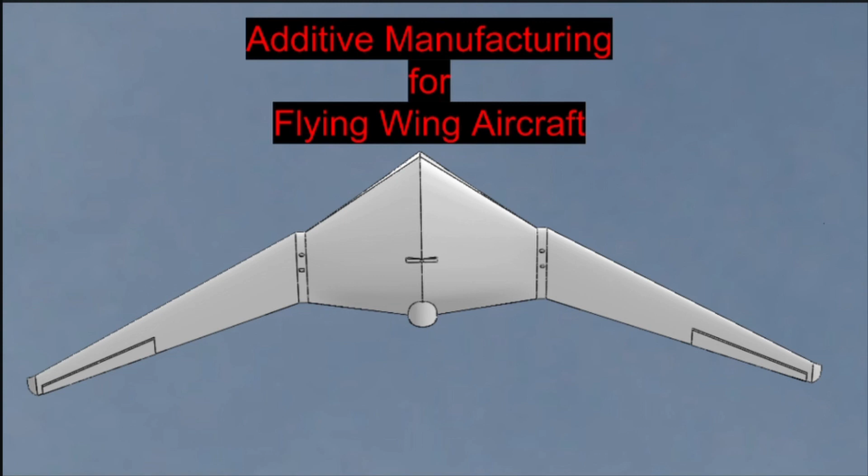Hi, thanks for joining me. Today I'm going to be presenting my project on using additive manufacturing for flying wing aircraft.

Let's start with the applications and purposes for these aircraft, because if an aircraft doesn't have any applications and purposes, there's no point in making it, even if they're really cool. Air travel is right now the fastest and safest method of travel, but it has one major downside, and that is cost. Right now, air travel is currently the most expensive method of travel.

So, in order to solve that, flying wing aircrafts can greatly reduce fuel consumption by making aircrafts more aerodynamically efficient. That is probably the top application for this aircraft. However, there are many others, one being for smaller civilian aircrafts.

Right now, small civilian aircraft only have a few hundred nautical miles of range. So, like a Cessna, rather than having 500 nautical miles of range, it could be increased to something like 800 nautical miles, because flying wing aircrafts use less fuel and are more aerodynamically efficient, which allows you to fly farther. It also increases the internal volume, so it can carry more fuel, which will further increase the range.

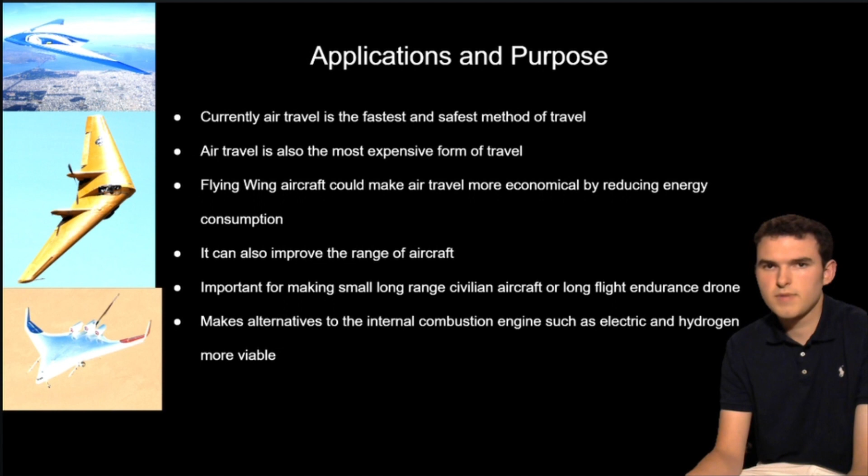Aerospace engineering is sort of like a balancing act between various different design domains that's grounded by the laws of physics. The goal of this project was to make a flying wing aircraft that's aerodynamically efficient, make it using locally available 3D printers, and make it stable enough to fly properly. So the main design domains prioritized for this aircraft would be, of course, manufacturing, because it needs to be made using additive manufacturing technologies done with locally available 3D printers.

And then, of course, it also needs to be aerodynamically efficient—it needs to be a flying wing, that's the whole point, so it needs a higher lift to drag ratio than a conventional aircraft design. Third, we need to prioritize the controls and flight stability of the aircraft. That's the third design domain that's prioritized.

But there are also other design domains that need to be taken into account. Particularly the weight—it needs to be light enough to take off the ground. It also needs to have a strong enough structure so it doesn't fall apart when flying in the air, because having a plane that falls apart is not good. Importantly, it also needs enough internal volume to house all the electronics, and of course it needs a method of propulsion, because if it doesn't have a propulsion system, it cannot maintain flight. That's all the design domains that were taken into account in this aircraft.

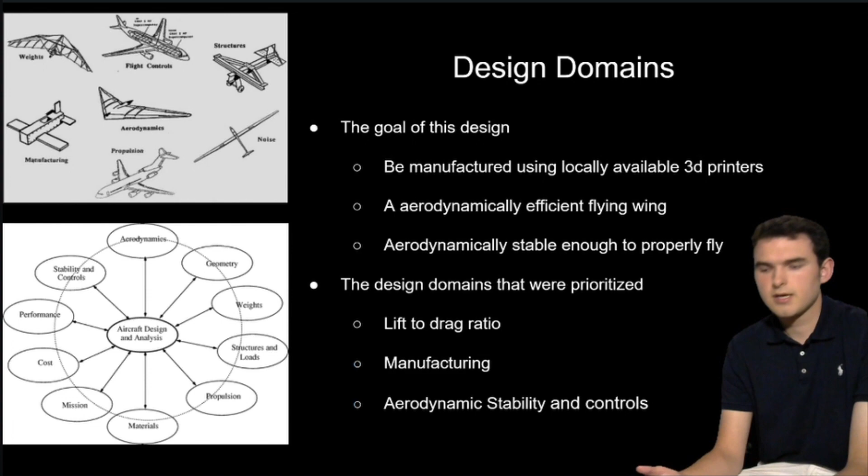So now I'm going to go over the problems with flying wing aircraft.

One of the issues with flying wing aircraft is flight stability. Flying wings have been around for a long time; Jack Northrop was the first to make them in the 1930s, and one of the huge issues was flight stability. They were difficult to control, and would sometimes even spin out of control. They didn't crash, thankfully, but it was an issue, and that's why the U.S. Air Force didn't use them in the 1940s—they couldn't control them stably enough for any practical application.

To solve that, a lot of aircraft use a reflex airfoil, which unlike a laminar flow airfoil reflects the air backwards. That makes it more stable across the pitch axis of the aircraft. It also has a huge drawback: it makes the aircraft less aerodynamically efficient because it's reflecting air backwards, pushing less air downwards. Airfoils work off the change of momentum of the airflow, and that has two benefits.

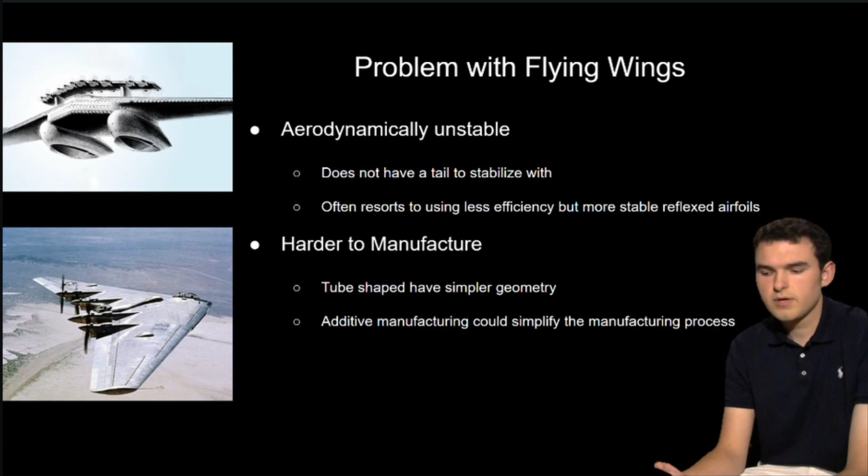Going into the aerodynamics of the fuselage, these flying wing aircraft could offer about a 20% increase in lift to drag ratio. But of course, one of the issues, as I discussed earlier, is that they rely too much on reflex airfoils. In this project, I addressed this by using the loft feature in SolidWorks to loft a reflexed airfoil to a more laminar flow airfoil that's slightly asymmetric. By lofting them together, you get less reliance on a reflexed airfoil.

As you notice in the flow simulation, the air becomes less turbulent and more laminar as you go from the center reflexed airfoil to the outer laminar flow airfoils in the fuselage design. To make up for the decreased reliance on reflexed airfoils, we use a V-tail in the back that increases the pitch stability and also the roll stability of the aircraft. It only adds a minimum amount of parasitic drag, which allows us to greatly improve the lift to drag ratio of the aircraft.

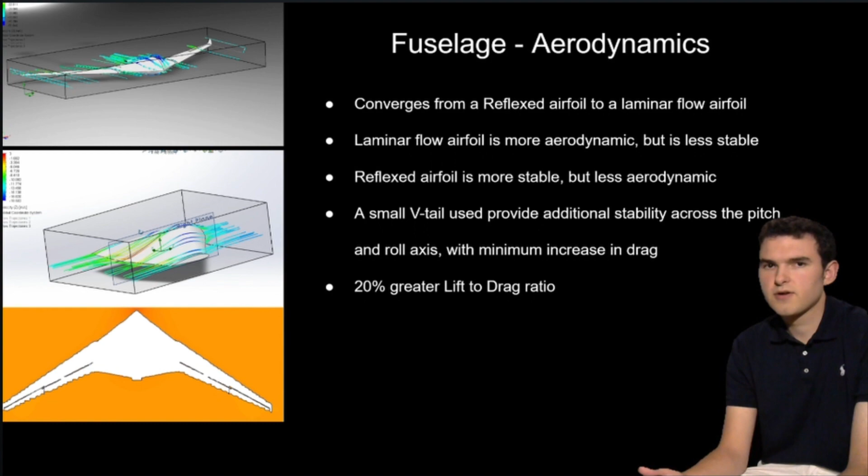So now going into wings. For the wing, I use a NACA 2412 airfoil. It's slightly asymmetric, and the reason I wanted it slightly asymmetric is that we want it to be as aerodynamic as possible, but we want a little bit of higher coefficient of lift, so that's why I didn't go for a completely symmetric airfoil, so the stall speed isn't too high. This also makes it more stable across the pitch axis of the aircraft, because it's pushing less airflow downwards relative to the bottom airflow of the airfoil.

One thing you'll notice about this aircraft design is that the wings are swept back 35 degrees. A common misconception about swept back wings is that they decrease the coefficient of drag of an aircraft. They do not decrease the coefficient of drag at all. What they do is increase the critical Mach number of an aircraft - the Mach number at which it enters transonic drag. A typical aircraft with a straight wing enters transonic drag at Mach 0.7, but by sweeping back the wings, you can increase that critical Mach number. In our case, with 35 degrees of sweep, it increases from Mach 0.7 to Mach 0.855.

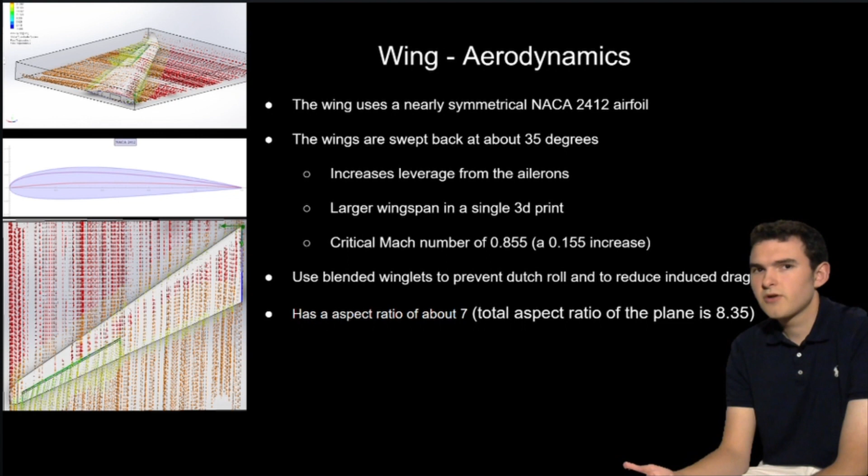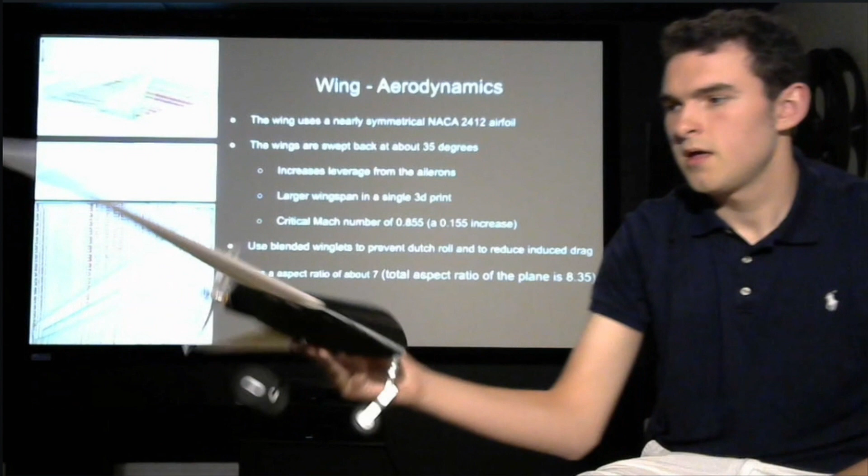Of course, the aircraft I built does not fly at Mach 0.7 or Mach 0.855. Here it is - is that right here? If you can see it. Hopefully you can see it. So, place it back there. So what this does, as I talked about earlier, is one of the advantages - it increases the critical Mach number. This aircraft is not going to fly at Mach 0.85, if you didn't already know.

However, it has two advantages for this particular aircraft. Since it's not aerodynamically beneficial, but it is beneficial from a control standpoint, as I talked about earlier regarding design domains, control stability was one of the biggest design domains of this aircraft. Sweeping the wings back actually improves the control and stability of the aircraft, because it gives more leverage to the ailerons, or in this case, they're technically elevons since they also act as an elevator. By sweeping them back, you're making them farther from the center of gravity, and that's what gives the elevons more leverage on the aircraft.

It also benefits it from a manufacturing standpoint, because by having the wings swept back, you can essentially print more area for the wing in a smaller print bed, since it spans across the X and Y axis. You can maintain a high aspect ratio while increasing the surface area of your wing in a single 3D print. So those are the benefits.

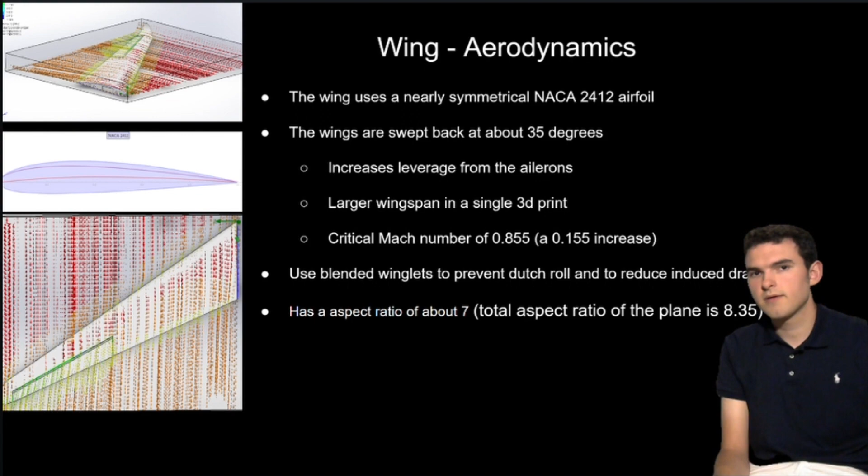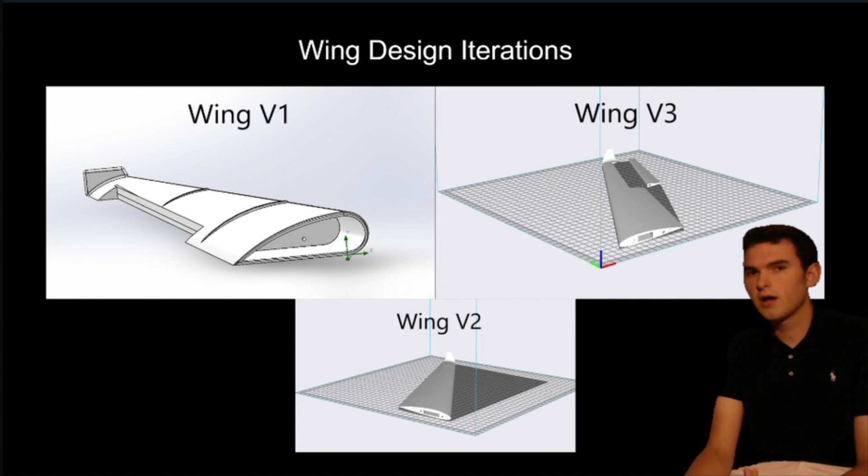So here's the wing design iterations. As you see, there's a V1, V2, and V3, and I'll get into all of those in the next slide. Starting with wing V1 - I'm not going to sugarcoat it, it was probably by far the worst design for this aircraft, but it was also my first time designing a wing in SolidWorks, and it very poorly fits the design parameters of this project.

For one, it uses a very highly asymmetric airfoil, which makes it well optimized for low stall speeds, but it has many disadvantages. It decreases stability across the pitch axis of the aircraft because it pushes more airflow downwards relative to the airflow below the wings. So it's not good for flight stability.

The second big disadvantage is that it greatly increases the induced drag coefficient, since it increases to the square of your coefficient of lift. By using these higher coefficient of lift airfoils, they actually make it less efficient from a drag standpoint. So if you want a higher speed aircraft, you want your airfoils to be less asymmetric to make the aircraft more aerodynamically efficient.

Another huge disadvantage with this design is that it has 4 times the wetted area, which greatly increases the parasitic drag - essentially the typical drag you think of in an aircraft, the drag that has to move around an object. Having more than 4 times the wetted area of the final wing design also doubles the weight of the wings, meaning a lot more weight to the aircraft, which requires a lot more energy to maintain flight and take off - a big disadvantage.

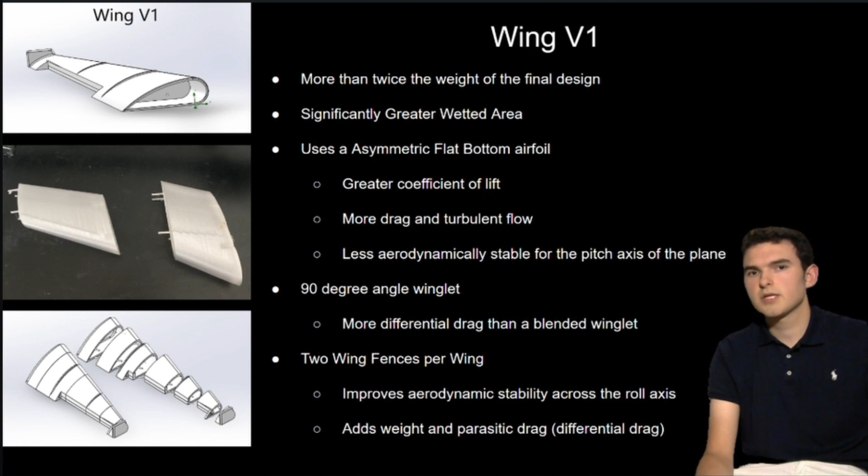So that's wing V1. Now let's go to V2 and V3. I included them on the same slide because aerodynamically they're the same - the key differences lie in the structure of the aircraft, or the wings. For V2 and V3, they both use the NACA 2412 airfoils, as I talked about in my first slide regarding the wings.

The difference is in the use of carbon fiber spars for structural support. Wing V2 is designed relying on carbon fiber spars for structural support. It has great strength to weight ratio, but it has 2 disadvantages that left me decide not to use them.

The first is that it takes up a lot of internal volume that's needed for electronics. The second disadvantage is that it adds more complexity to the manufacturing process, since there's extra parts that need to be placed into the aircraft. So that left me using Wing V3, which uses a structure that does not rely on carbon fiber spars.

Technically there's a V4, but it's a very slight change. Essentially, the first Wing V3 that I printed out, one of the issues was that it printed horizontally on the 3D printer, and it created structural supports between the hole used for the axle that links the aileron to the actuator of the aircraft.

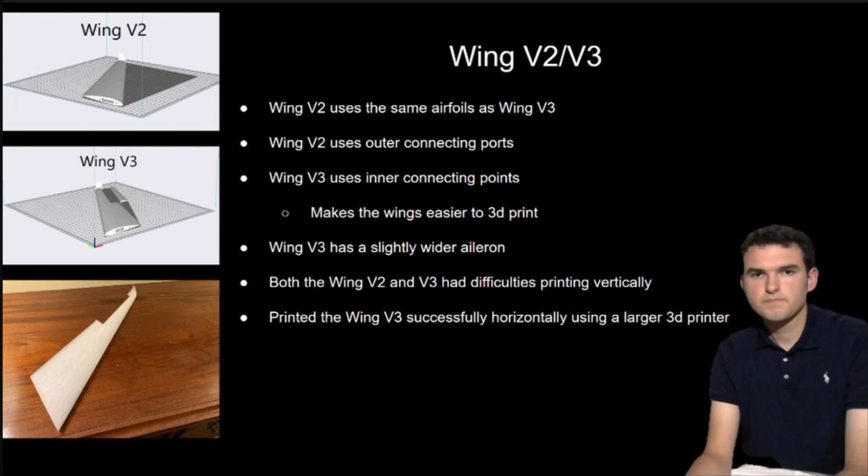For this wing, what I did was put a channel through the wings with V4, and that created more area for the axle to go through. Essentially what I did was put a straw in the channel that goes to the wing, and then I molded plastic weld around it to keep it holding up structurally. Then I put the axle through the straw inside the wing, and that allowed it to move around freely and connect to the aileron. So that's what I finally used.

So going into the structure of the fuselage: it's made out of an impact-resistant PLA plastic, and I decided to use PLA for this since it's fairly lightweight and easy to use.

For the wings, I use PETG, which has much greater tensile strength, but it is a little bit denser and thus heavier, about 11% more. PLA has 1.24 grams per cubic centimeter of density. PETG has about 1.38 grams per cubic centimeter of density, so it's a bit denser than PLA, and that's why I did not use it for the fuselage, which allowed my fuselage to be a bit lighter.

The structural strength isn't as important on the fuselage as it is on the wings, since the wings are longer and thinner. There's more stress on the wings, so that's why I went with a slightly heavier material that's stronger.

For the fuselage, one of the issues I had was having a top that could easily be taken off and on, since I needed to place electronics inside there and potentially replace them or program them by directly wiring the electronics into my computer to reprogram them if there's ever a software issue.

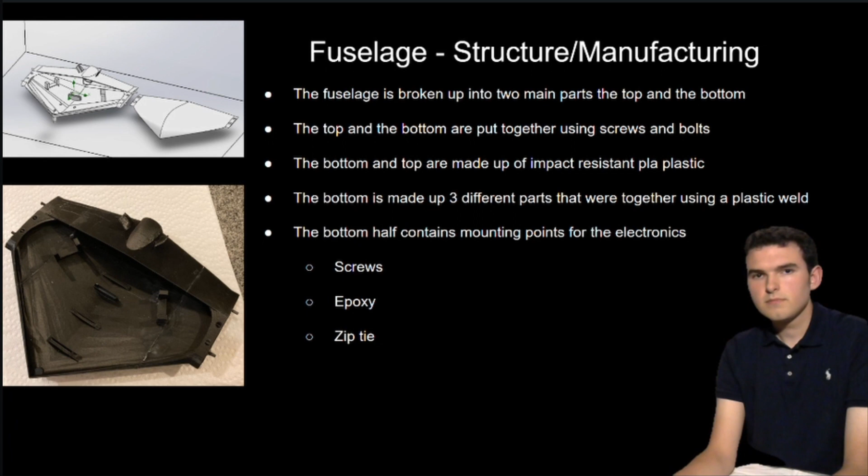The servos were originally intended to be epoxied in, but I later found out they fit so well, almost like a glove, that I could just place them in directly, and they're so tight that they didn't need any epoxy. For the battery, I had zip tie holes as mounting points, used for the battery and the ESC, which controls the amount of power that goes to the electric motor. And yeah, that's the structure of the fuselage.

Going to propulsion, originally this project was intended to use an electric ducted fan, since it offers greater energy efficiency by cutting off the vortexes formed around the tips of propellers with the duct. Not only that, but it also compresses the airflow, making it a much more energy efficient method of propulsion than propellers.

But they have major downsides. The duct greatly decreases the mass efficiency and volume efficiency of the propulsion system. That means you have to place it outside the aircraft, since there's not enough internal volume to fit the ducted fan inside for this particular design. And of course, it's a lot heavier than a propeller. Not only is it heavier, but it also requires a lot of outside structural supports, which add drag, as well as the duct itself adding more parasitic drag.

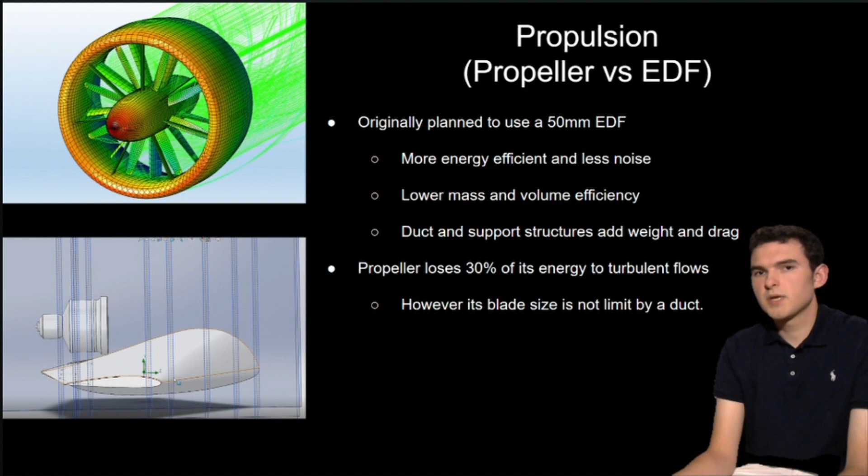And since it's placed above the center of gravity of the aircraft, it has to be angled downward slightly by a few degrees, which decreases the efficiency of the propulsion system as well. So ultimately, all these disadvantages led me to using a propeller, since it could be mounted directly into the aircraft and did not take up all this space or add an outside structure that added extra drag. That was a much better option, even though it had lower energy efficiency.

Going into the propeller that I used, to essentially decrease the efficiency gap between the ducted fan and the propeller, I used a new type of propeller called a toroidal propeller. It was recently developed by MIT scientists, particularly Thomas Sebastian, who came up with the toroidal propeller. By having the propeller angle inwards and have a curved tip, it reduces the tip vortices, making it harder for the lower pressure and higher pressure vortexes to mix together, which reduces the drag formed around the propeller and improves efficiency.

I went with a two-blade toroidal propeller, which I made using my 3D printer. The two-blade propeller has fewer pressure pulses per rotation than an equivalent three-bladed toroidal propeller, making the two-blade more efficient. However, it is louder, because the pressure pulses produced by a two-blade propeller are louder than those produced by a three-blade propeller. That's why I went with a two-blade, because it's more efficient.

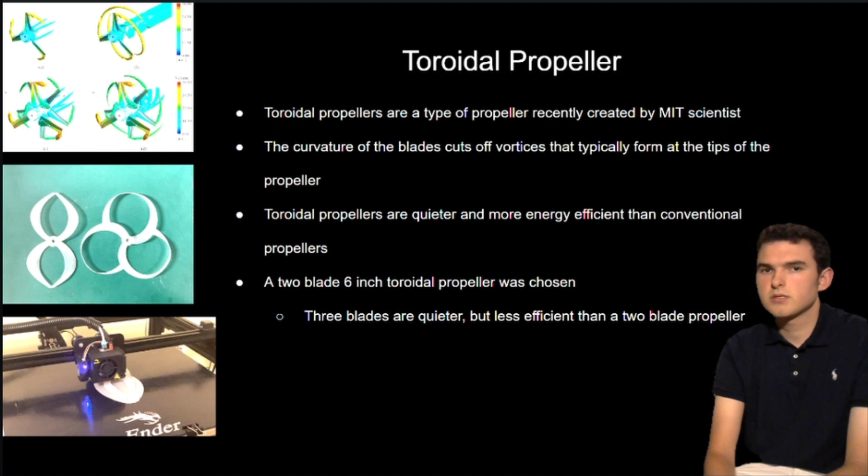Going to landing gears, finding the right ones for this project was tough, because Amazon and most other shopping sites online don't give the exact dimensions for the landing gears needed. And even for the ones that did, the landing gears turned out to be way too big for this aircraft. So I went to my basement and found my old Cessna model plane that I used to fly around and crash when I was younger. I took the landing gear out from that, and I found it had a great lock-in mechanism, which is used for mounting the landing gear to the aircraft.

It used essentially a small slit, and what you would do is compress the landing gear and squeeze it into that slit, and it would expand outwards and lock into the mounting, so no epoxy or plastic weld is needed. I used that mechanism and implemented it into my CAD model, and that made it a lot easier to implement the landing gear inside the structure of the fuselage.

That made it a lot easier on the design aspect. Going into the front landing gear, I used a mounting point and then epoxied it in. In that landing gear, I found one online, and that one actually gave me the dimensions, and they were good dimensions.

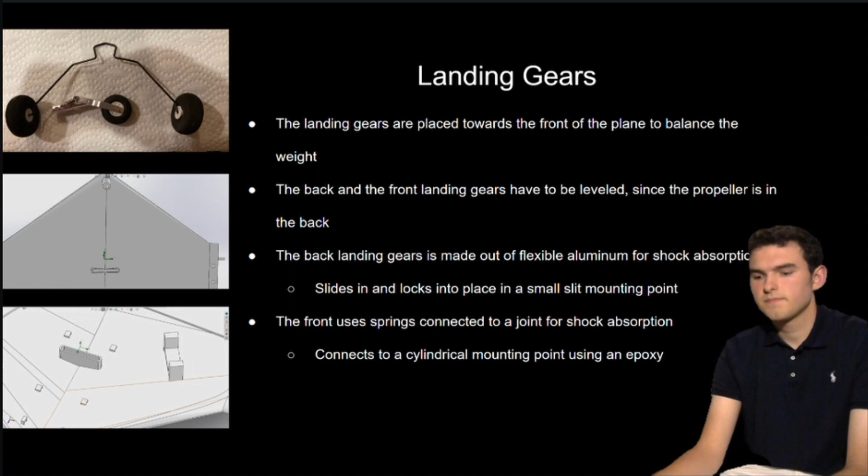Going to electronics, I used a 1500 milliamp hour battery, which I placed in the front since the aircraft was actually a little tail heavy, and that helped balance it out from a weight standpoint. Then I used an F411 flight controller, which is like the brains of the aircraft.

It has essentially a lot of sensors inside of it. It uses a gyroscope, a very small one that's linked to a couple of stators, and based off of the pivoting of the aircraft, the gyroscope will maintain its orientation. Based off of the electrical charge picked up from the stators, the aircraft can determine its orientation.

It also uses an accelerometer, which works off of MEMS technology and essentially the piezoelectric effect, which is a material that generates an electric charge when you put pressure on it. It has a ball surrounded by piezoelectric material, and when the aircraft moves or accelerates, the ball will move from that change in acceleration and push against the piezoelectric material, generating an electric charge. That's how it measures acceleration.

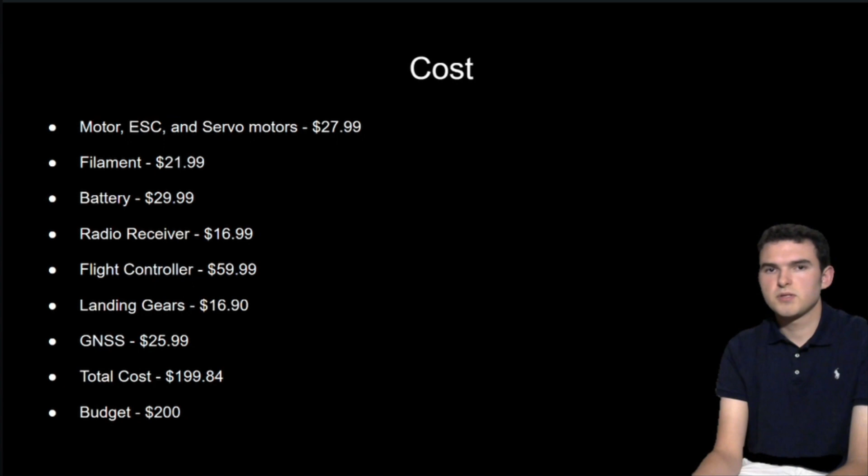So yeah, that's my aircraft project, and thank you for listening, and I hope you have a great day.